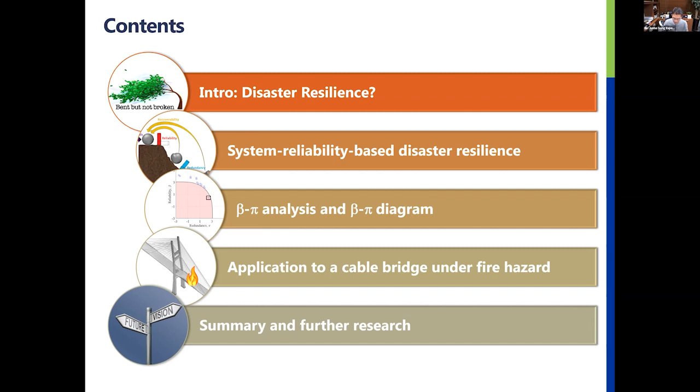So if you look up this word resilience in the dictionary, it's going to give you some simple definition as something you can see on the screen. So simply, usually resilience refers to the ability to become strong, healthy, or successful again, even after something bad happens. And also there are many pictures that try to describe this concept of resilience. But my favorite one is the one you can see on the screen. This tree is being bent during this strong wind event, but it's not being broken. So it will also eventually come back to the original beautiful shape.

And also this resilience concept has been discussed and investigated very deeply in science and engineering recently. One of the pioneering works was done by Holling in 1973. And he talked about this resilience as some sort of alternative viewpoint to the ecological system's ability. So traditionally, they use this stability viewpoint. So here they assume that they can predict what is going to happen in future. And so they want to achieve equilibrium and also some system that has a minimum fluctuation in future.

But if you take this resilience approach, like an alternative viewpoint, it means we admit that we cannot predict what will happen in future. So instead of requiring some precise capacity to predict the future, they aim at some system that can absorb and accommodate some uncertain events in future.

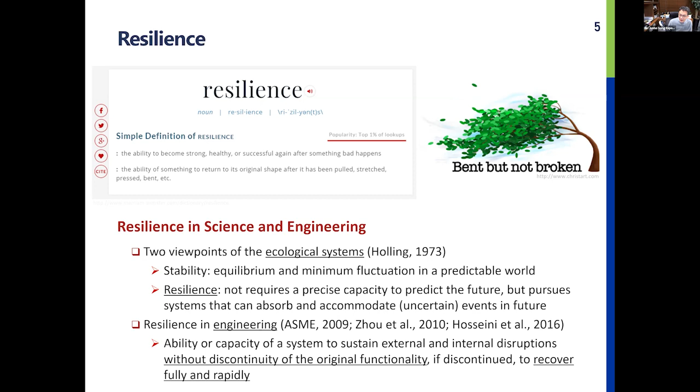So there are lots of work about this disaster resilience, but one of the pioneering work in the earthquake engineering area was done by Bruneau and Reinhorn, and they presented this paper in a national conference on earthquake engineering in 2006. And on the upper right corner, you can see this kind of plot or function. They call it restoration curve or performance measure curve.

So if you look at any papers about resilience, it's very often they use this kind of curve to describe the resilience of a system and also quantify it as well. Usually the y-axis is representing quality of infrastructure or performance level or state of the system. As the disaster occurs, the level of this performance quickly drops, and then it's going to recover to the original or some different level of state. For example, they just measure this area to quantify the resilience of a system.

But I just remind myself that in their work in 2006, they described the resilience by 4 different criteria or concepts, such as robustness, redundancy, resourcefulness and rapidity. So even from the beginning of their research or discussion, they aimed at some sort of holistic and multi-aspect understanding of the system's capability against the disaster.

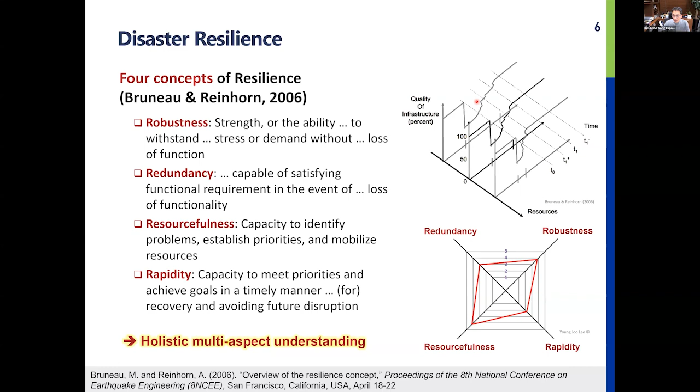So there are many researchers working on this disaster resilience, but my motivations are as follows. This resilience concept was originally created to describe the capability of some living thing, like an ecological system. But as we all know, the civil infrastructure system is not a living thing. So it means we human engineers are kind of breathing resilience DNA into this civil infrastructure system. If you're doing some research on resilience, you have your own wish list about the resilience DNA you want to implement into your civil infrastructure system. So this is my personal wish list.

First, this so-called performance measure or restoration curve is often used as a single measure over different options or decisions. But the definition of this performance measure is often subjective or disputable. Also, we cannot describe resilience by only one measure. And there is lots of uncertainty in the hazard and also the response of the system, so we should handle this in a probabilistic manner.

Second, the civil infrastructure system is a very complex system, or sometimes a system of systems. So we must have a systems perspective when we evaluate resilience. But so far, analyses of resilience have been focusing on either components or system only, and the relationship between component reliability and system redundancy is not very well known yet.

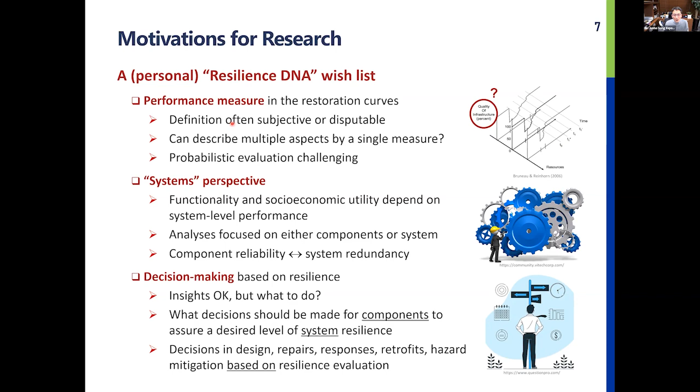So with these items in my wish list, I wanted to build a new framework based on the system reliability concept. One of the reasons I went in this direction is that this is my research focus in my career. As you can find from the reference information at the bottom, in this chapter of the book, I summarized research developments I made during my PhD study and my career at the University of Illinois. And at the bottom, recently I published a review paper about system reliability analysis with my former students at Illinois.

For those who are not familiar with system reliability, in a nutshell, system reliability analysis aims to compute the failure probability of a complex system based on the reliability of each component and the statistical dependence between components. And finally, we want to consider cascading effects in our systems too. So as you can see, this is a very complex analysis, and I developed some methods to handle and overcome these issues.

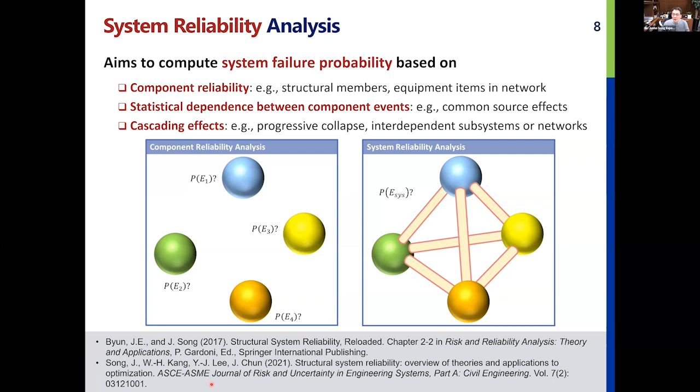So with system reliability in my mind, during my sabbatical leave at Carnegie Mellon University, I started drawing a figure that can demonstrate or visualize my system reliability perspective on disaster resilience. I was inspired by metastability from a physics course. I believe as an engineer, when you took a physics course in your college days, you have seen pictures like this.

So I consider this ball sitting near the cliff as our civil infrastructure system, whether it's a bridge or a lifeline network or our urban community. As we know, this civil infrastructure system is always under some hazard, whether it's an earthquake or strong wind, and they are going to push our system down the cliff at some time. We don't know when it's going to happen. So I tried to describe the disaster resilience or capability of this civil infrastructure system using 3 criteria.

The first one is the reliability, represented by this red block in this figure. So this reliability refers to the capability of the components in our civil infrastructure to avoid initial disruption. So even if there is some hazard, if you have enough reliability, there will be no significant disruption in your system. So that is the reliability. But we cannot have an infinite level of reliability because we cannot afford it. So that kind of damage or some failure will happen.

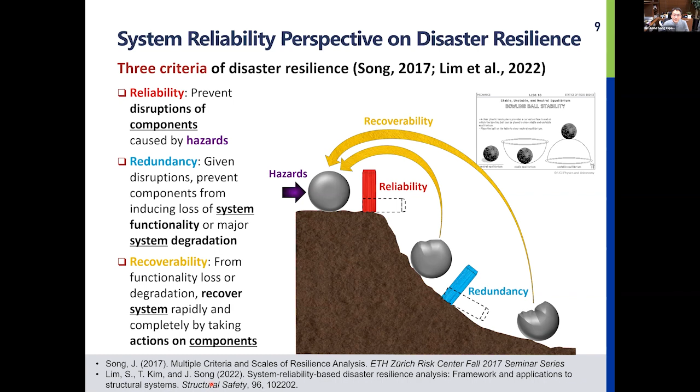So with this picture in my mind, I wanted to develop a method to evaluate the disaster resilience of our system from the 3 criteria and also from a system reliability perspective. I'd like to illustrate this framework and the criteria using a real event example in Korea. You are looking at the Seohae Grand Bridge in South Korea. This is the first composite cable-stayed bridge in Korea, and also one of the busiest bridges, with around 42,000 vehicles per day.

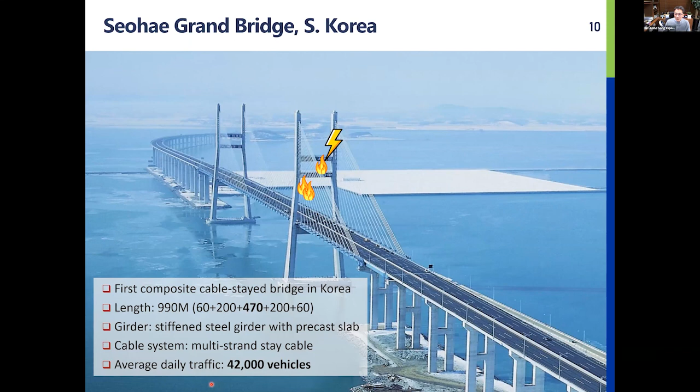But one day, there was lightning and a fire on the cable. I'm going to give you some details about this incident. On December 3rd, 2015, one of the cables caught on fire, induced by lightning. So cable number 72 was the origin of this fire. But this cable 72 was located very high, 80 meters above the deck level, so it was extremely difficult to extinguish the fire. It took 3.5 hours to extinguish it.

Because of that, this cable was completely ruptured, and then it swung into the other cables. So cables 56 and 57 caught on fire too, and they suffered partial failures as well. So a total of 3 cables were partially or completely damaged. And also 1 firefighter unfortunately passed away.

There was also a huge indirect loss, because they were concerned about the performance of this system under normal traffic conditions. So they decided to shut down the traffic completely until they replaced the cables with new ones. They thought it was going to take a month, but they were able to reopen the bridge in 16 days.

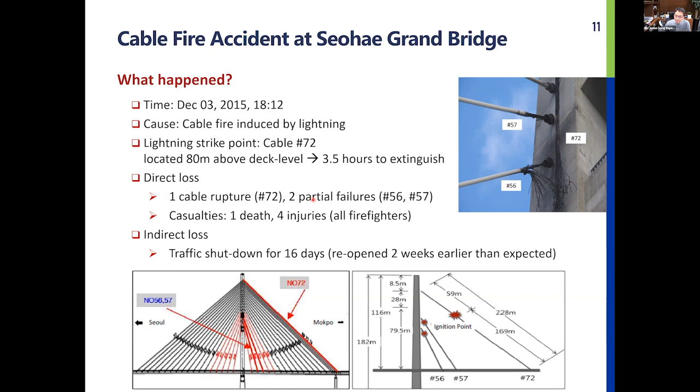So if you look at this event through these 3 lenses of the disaster resilience framework I'm proposing, I think we can have a better idea about these three criteria. First, in terms of reliability, these cables did not have enough reliability, although these bridges are susceptible to lightning because of the environmental conditions. This bridge did not have a lightning rod, and they did not have the capability to extinguish the initial cable fire quickly.

So because of this lack of reliability, they started being concerned about redundancy. Fortunately, they did not have immediate progressive failures, although 3 cables were damaged. But they were not confident about the performance of the system under normal traffic, so they had to shut down traffic completely. So it led to huge economic losses.

But in terms of recoverability, it was a champion case, because they were able to replace these 3 cables in just 16 days. The key to this success was that they had enough resources. For example, they were able to find cables from construction sites nearby. They also had excellent bridge experts, and they kept information about this bridge, including finite element simulation models. So they were able to do this very quickly.

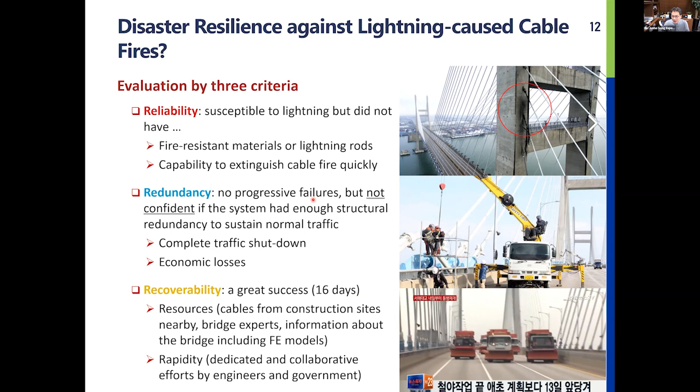But I also noted that there are multiple scales to which we can apply this framework. So you just look at this structure level. It means we consider this cable stay bridge as a system, and there are many components like cables and decks. But if you step back, this cable stay bridge is a component in a bigger transportation network in a city. So we can apply this resilience analysis to the network level as well, such as transportation network or power or gas distribution network too.

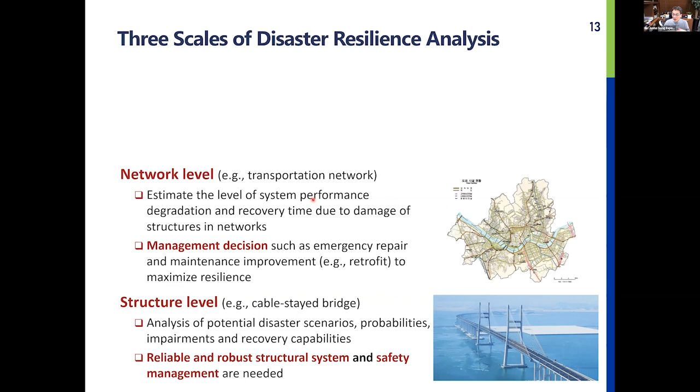So by doing this analysis at the network level, you might want to come up with optimal or better management decisions for these networks. If you take one step further back, you can find the bigger scale, which is a community level, because this lifeline network is also a component of this bigger urban community. So by applying these 3 criteria to this community level, you can find some meaningful outcomes as well.

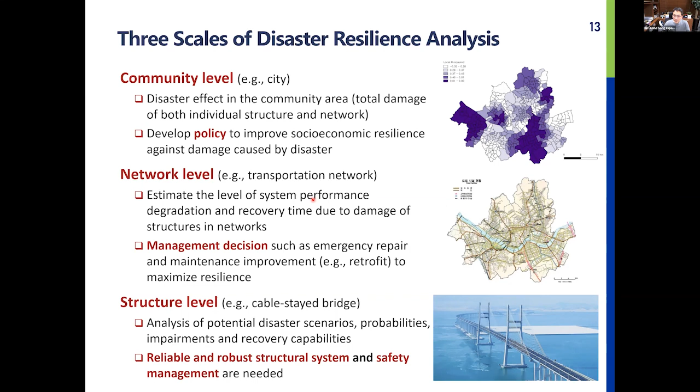So far, I talked about 3 criteria: reliability, redundancy, and recoverability. They are capability of the component and the system, and also capability of your engineering society and the community as well. Also, there were 3 different scales: individual structure, network, and urban community. So in this paper I published last year, I named this a 3x3 resilience matrix. It means there are 9 cells in this table. For each of these cells, you can identify some research needs. But today, because of lack of time, I'm going to focus on the individual structure level, especially reliability and redundancy of individual structure.

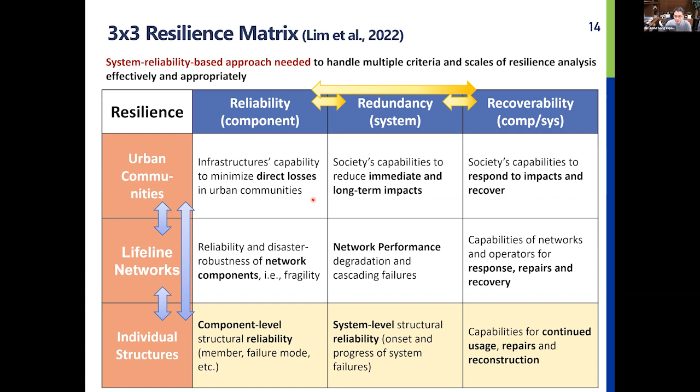So in order to perform some actual analysis with these 3 criteria in mind, we have to have some sort of quantitative measure, such as an index. So we invented or reinvented these reliability and redundancy criteria for the purpose of this kind of analysis. First of all, reliability index beta is related to, please forget about this detailed mathematical expression, you don't have to focus on those details. But this beta can be computed in terms of the probability that a certain initial disruption scenario occurs given the hazard of your interest. If you look at this figure on the right-hand side as an example, in this simple structural system, you can think about an initial disruption scenario like members 2 and 5 fail together. That is one initial disruption scenario, Fi.

Then by performing so-called structural reliability analysis, using structural analysis and statistical information about the random quantities in this problem, and also many algorithms, you can compute this probability. Then you can translate it to reliability index beta. Next, this is a new one, because we've been using reliability index beta a lot in the structural reliability community. But the redundancy index is a new index I propose in this paper. I assigned the Greek letter pi to it because I examined all the Greek alphabet from alpha to omega, and I found the word pleonasmos, which means redundancy in Greek, and it starts with pi. So I chose pi to represent the redundancy index.

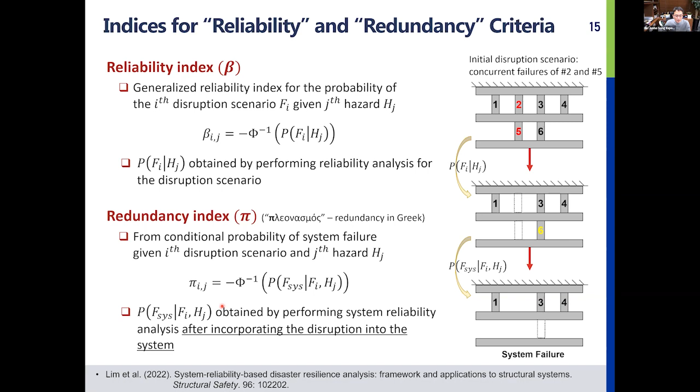As you can see, pi is computed in terms of a different probability, that is the probability of system level failure given the occurrence of this initial disruption scenario. Using the example on the right-hand side, our initial disruption scenario was concurrent failure of members 2 and 5. So we don't have those members anymore, and the system is going to be less redundant. So what's the probability that this system is going to be broken into two parts? One possible scenario is that member 6 fails because of the redistributed load. Or if 1, 3, 4 all fail, this first layer is also disconnected. We can compute this system level failure probability by performing so-called system reliability analysis. Then you can find the redundancy index pi.

So for each initial disruption scenario we examine, we can compute this pair of beta and pi, and we can put them in this scatter plot. So we are going to have as many markers as initial disruption scenarios that you consider. From the previous figure, you just got one marker, at one location in this beta pi diagram.

Here, please ignore these details, but using pi and beta and also the mean occurrence rate of the hazard, you can compute the annual probability that your system is going to fail because of this initial disruption scenario. We want to control this probability below so-called de minimis risk. It's the risk society accepts without special regulation, some risk we should live with. So in this scatter plot, in the red area we cannot satisfy that constraint. In the white area, we are okay. That means by performing this beta pi analysis for all initial disruption scenarios, we can identify scenarios that cannot satisfy this condition. Then we should make decisions or actions to move this marker outside so that our system is resilient against any initial disruption scenario you imagine.

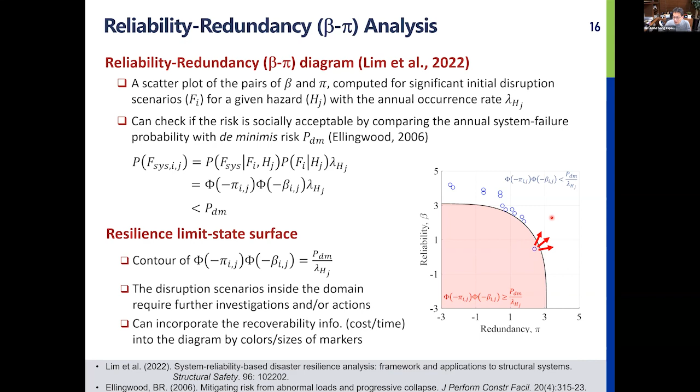So here we found that if only one or two members fail, you don't have enough resilience for that system, so you should do something about them. And also there were 3 criteria, right? Reliability, redundancy, and recoverability. The recoverability information can be incorporated into this beta-pi diagram through colors or marker size, so that the decision maker can incorporate this third information.

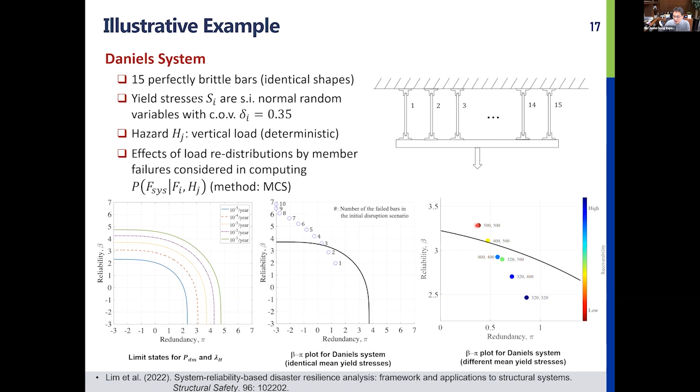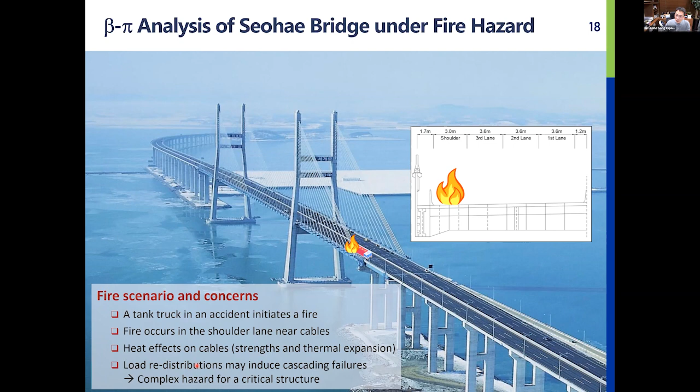So I'm going to demonstrate this beta-pi analysis through the same bridge, but this time under a different hazard, which is a fire from a tank truck. Here we assume that the tank truck had an accident and initiated a fire, and the fire occurred in the shoulder lane near the cables, which are very critical ones. Heat impacts on the cables will reduce the structural strength, and thermal expansion will occur. And if some cable is damaged, load is going to be redistributed, so you might have some cascading failures too. So this is indeed a complex hazard occurring for a critical structure.

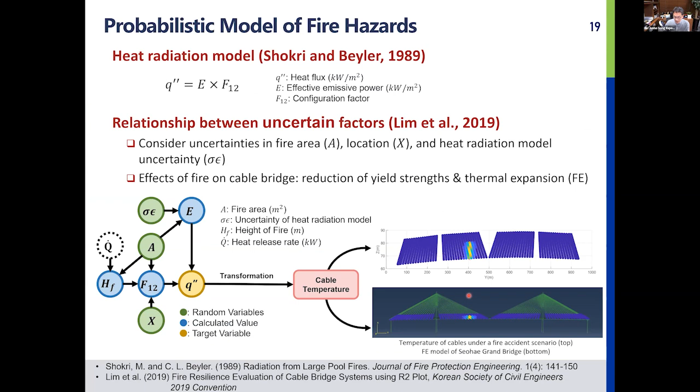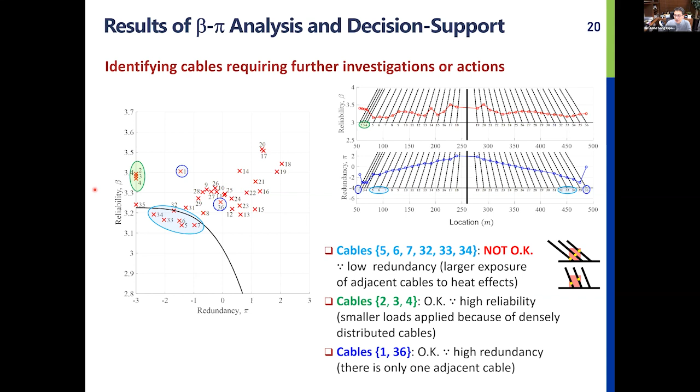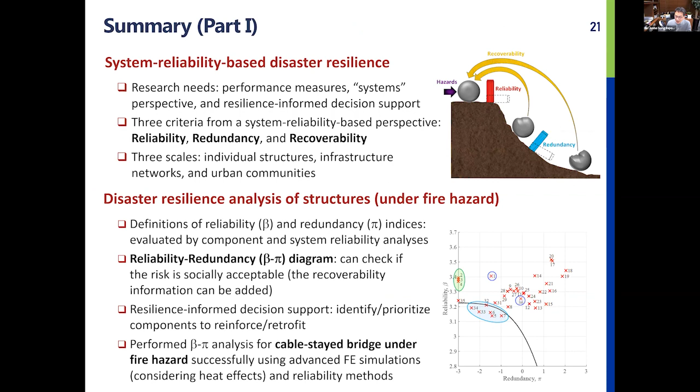So we should do something as engineers to move these points outside that area. Maybe we can put some walls there, or wrap the cables with fire-resistant materials. For the sake of time, I'm going to skip this summary slide, but so far I talked about disaster resilience and showed this analysis using a real cable-stayed bridge under fire hazard.

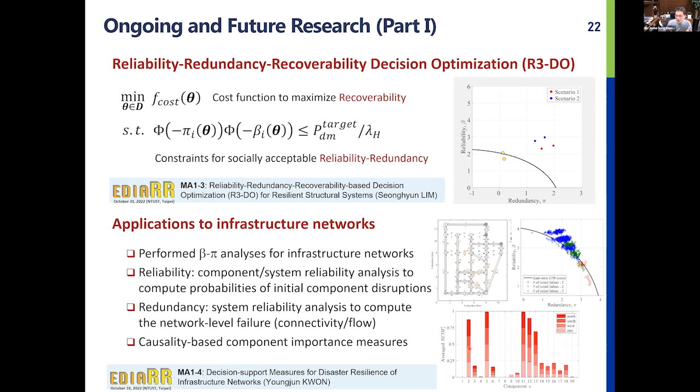And right now, I'm further developing this for optimization. In this optimization scheme, we want to maximize recoverability while satisfying socially acceptable reliability and redundancy for the system. Another application is the next scale, which is a lifeline network. For this complex network problem, we check beta and pi for each initial disruption scenario. And using this so-called causality-based component importance measure we are developing, we were able to quantify the relative importance of components so that we can prioritize our actions on those.

Okay, so then I'm going to move on to the next part. Here, my theme is risk intelligence. Again, I'd like to recognize the great contribution from my current and former students, including Professor Ji-eun Byun, who recently joined the University of Glasgow, UK, as an assistant professor. I will first explain what I mean by risk intelligence, and then demonstrate the 4 elements I identified of risk intelligence: identification, integration, inference, and implementation, using some examples.

So in 2020, we had a conference, IABSE conference in Seoul, and actually I was a moderator of this wrap-up session titled Toward Risk Intelligence of Infrastructures. And after my brief introduction about what I mean by risk intelligence, we had a very useful and helpful panel discussion by keynote lecturers. And then we called it Seoul Agenda 2020.

So what is risk intelligence? I'm proposing or promoting this as a future paradigm of risk management of civil infrastructure, beyond just simple risk analysis. We want to mimic how human beings identify risk, how they integrate information to identify and handle this risk, or how we infer or implement what we found in our actions. But now using this unprecedented amount of big data, advanced probabilistic theories and machine learning, we have a chance to achieve this risk intelligence these days.

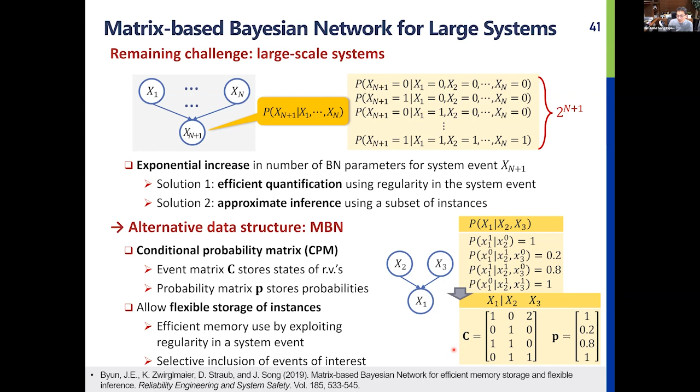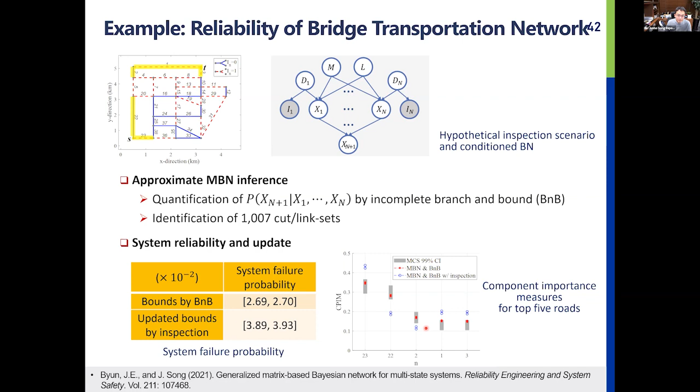But then when you have some inspection results, these importances actually go through significant change. Those are kind of probabilistic inference. So based on some new inspection result, you are improving or updating your prediction about the performance of your structure or components.

And finally, the fourth element is implementation. So this is related to decision making. How can we make a best or optimal decision based on the risk we quantified? So that is actually a quite active research area called RBDO, Reliability-Based Design Optimization.

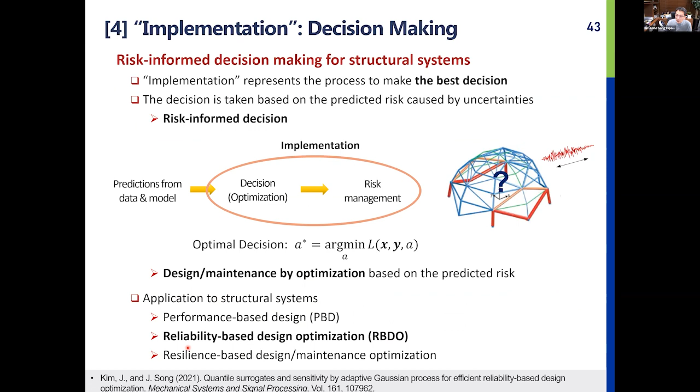So if I explain this with one figure, if you ignore the risk in this optimization problem, you are going to be happy with this black marker, okay? Because that's the point in this design space which is safe and also minimizing this objective function. But since there is uncertainty, as you can see, there's a significant likelihood that you are going to have this failure. So we cannot eliminate the risk, but we can manage it.

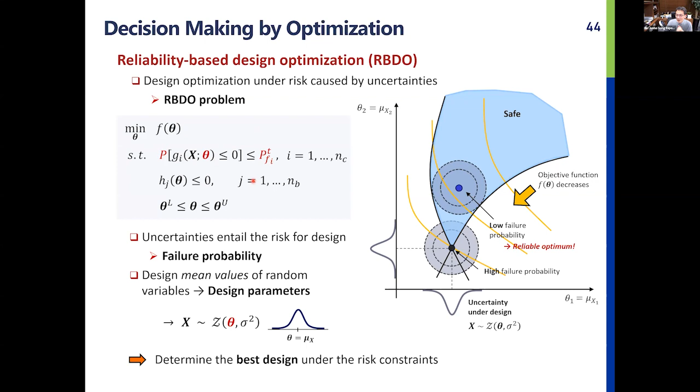So in this optimization scheme, we describe this constraint probabilistically. We want to minimize something or maximize something while the probability of failure is lower than some value. So that is so-called RBDO. Here in our particular approach, we developed this so-called quantile surrogate-based method so that we can handle the huge computational cost in this RBDO.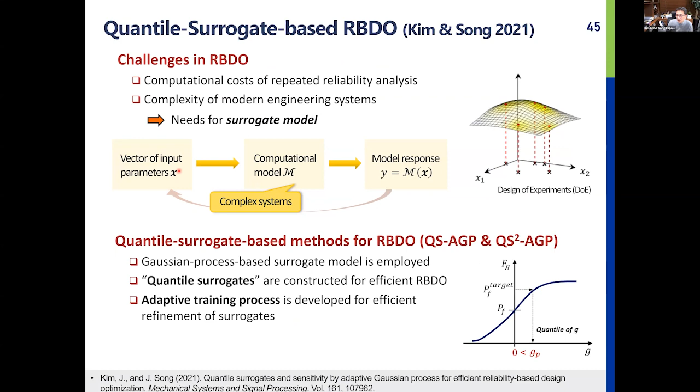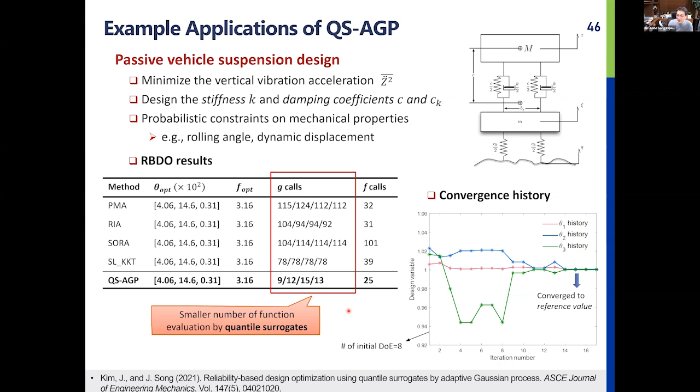And using this particular method, we got the same or similar optimal design, while calling the computational simulation much fewer times. So by comparing our performance with the existing RBDO methods, we found that this one is more efficient and also still accurate in terms of optimality and satisfying the constraint on the risk.

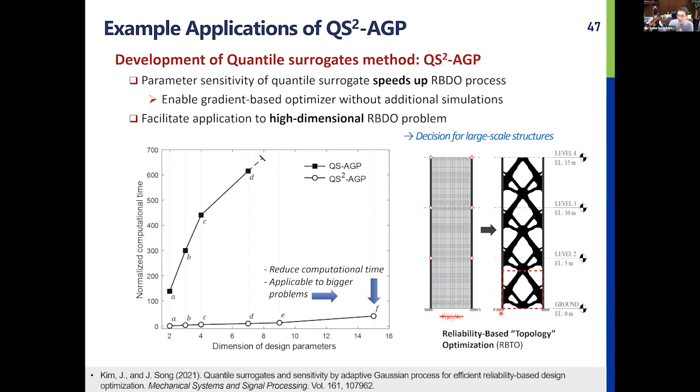And also in this second version, QS2 AGP, we use sensitivity information so that we can use a more efficient optimizer called the gradient-based optimizer in our optimization algorithm. As you can see in this figure, we were able to reduce the computational time dramatically using the second version. And also we were able to cover a large number of design variables or parameters. So actually we can apply this kind of algorithm to optimize topology or shape of the structure while we are managing the risk at a certain target level.

So here, this is a summary of the second part. By identification, we can learn better about the structural system or civil infrastructure from the available data. From integration, we can get the maximum information and knowledge from data, information, and a given model through data assimilation. And also we can infer, meaning we can predict better if some new observations are available through sensors or other sources. And finally, we can make good and optimal decisions while satisfying constraints on the given risk.

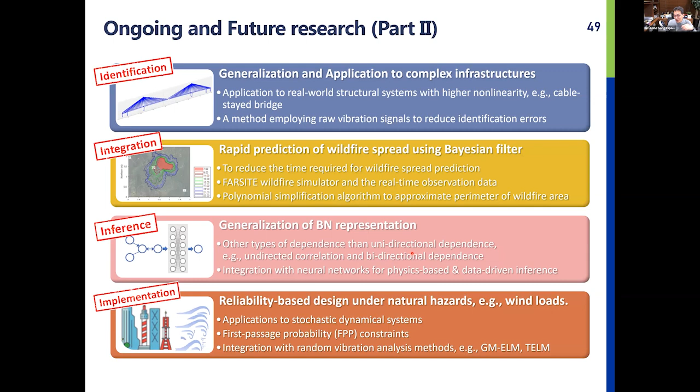So actually, I believe if there are some audience who are requesting, the PDF version of this slide will be shared. So this is kind of ongoing and future research topics related to each element. And also these are the reference information about the works I just briefly presented in the second part of the presentation. But the purpose of this talk is just to talk about these two main themes, disaster resilience and risk intelligence. So I was not able to cover all the details, but I hope that with this example, you got a better idea about what I mean by these two main keywords or themes.

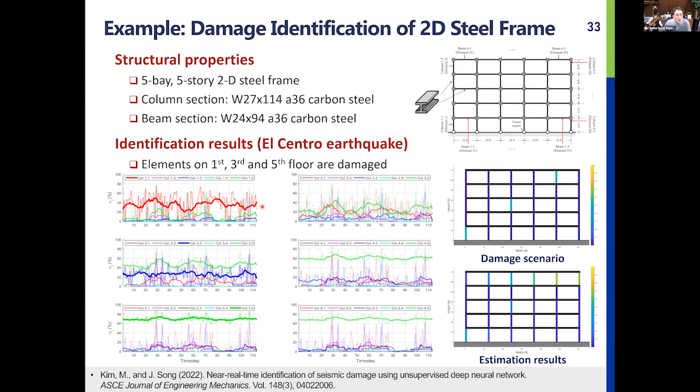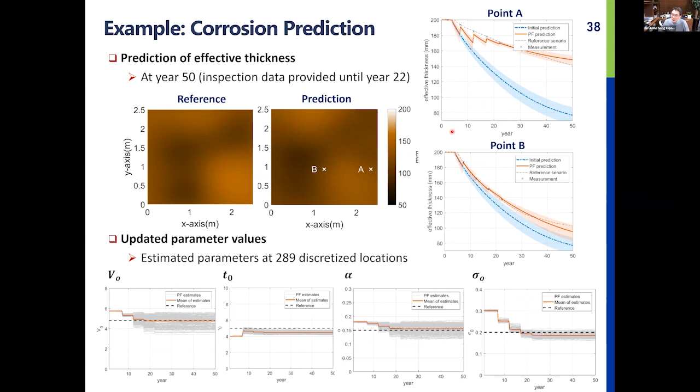Okay. So as you can see in this figure, this vertical arrow represents the time step. So it means during the earthquake event, we are going to get the dynamic response of a structure at every discretized time point. So we are already incorporating this data at every time point on that axis. In this integration part, in this example, time steps are larger because we are talking about years. And this kind of decision doesn't have to be as rapid as the previous one because deterioration usually goes on very slowly. But if it's a more extreme one, there is no technical limit on how often we can incorporate this data on the time axis.

For this Bayesian network, there is a method called the dynamic BN. Dynamic BN means that we have a Bayesian network model for every time point. Then these Bayesian networks at different time points are connected by another set of arrows to describe how the system changes over time. So it is possible, but I don't think we can do it as often as the first case.

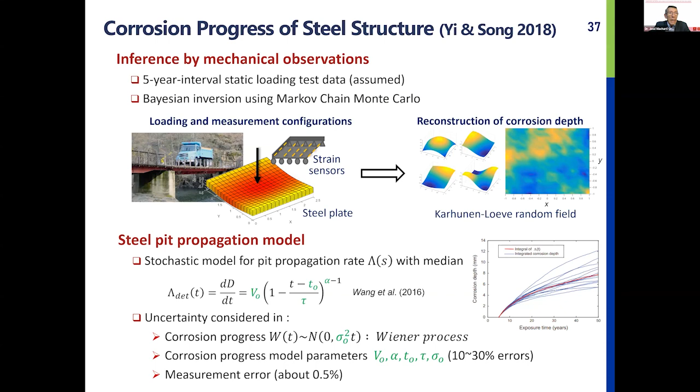Please, and I was also very... May I make a question, please? Absolutely. Valentina. Okay. I want to know, Dr. Song, in what moment or how is it possible during the process of the analysis to incorporate the sensitivity of the results on data? I mean, we can have different quality and quantity of data. And is there any point of control along the process to identify the risk of using one or another kind of data?

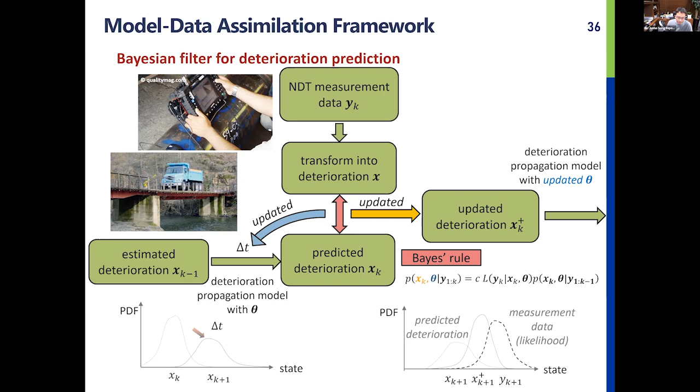That's an excellent question, and thank you very much. So I think that question is most related to this second element, integration. Here in this data assimilation, it is very important to know the quality of the data you are getting. So here, you see this measurement update action, right? Based on the new measurement about some state of the condition of your structure or some environmental effects surrounding your structure, you are going to adjust your prediction about the next time step.

But as you said, if our measurement has lots of noise, this adjustment is going to be also inaccurate. It means we should not rely too much on this information from the measurement. So then how much weight should we assign to this new information from the measurement? That is quantified by this variance or covariance matrix in this formulation. So as an engineer, you should know a priori how good this measurement or data is, and we can quantify it in this system.

So then, if you know that this data is noisy and the sensor has lots of error, this adjustment is going to be more conservative. So there's a way we can incorporate that. Okay, very, very clear. Thank you. Thank you.